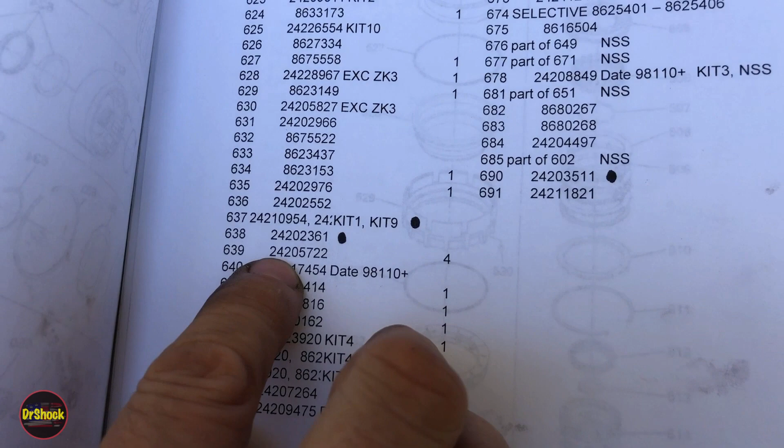I think it's probably these 4 722 ones here, but we can verify in our parts list. Take a quick look here, we're looking for part 639. Part 639 is 242.05.722 for this particular year, and that is exactly what we've got.

So let's go and fish them out from inside here. And that looks like them right there. 1, 2. There's actually a couple of different ones, so we want to make sure we get the right ones. I think it's these smaller ones. Just give me a moment, guys. 3, 4. Yep, that would be it, because there are 4 of those and 2 of these.

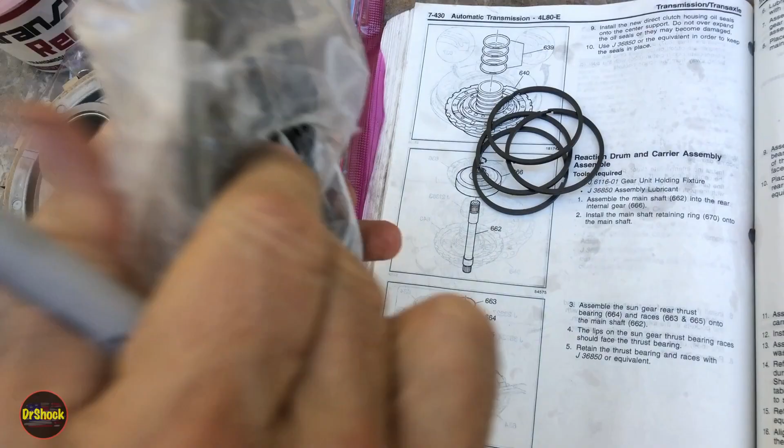All right, we're just going to make a notation that we got those and used them, so they consumed those 4 parts.

And these guys, just like when we took them off, right? So they're just opened like that. We're just going to open them slightly and work them down into position. You can either do the top one first or the bottom one first, it doesn't matter. You just want to make sure you don't damage them. All right, that's 3. Last one.

All right, so I just want to make sure they're in all the way around. And then, like the service manual recommended, I'm going to use a little bit of Transgel to keep them in position until we get the rest of the assembly done. After this, we'll move on to the next step.

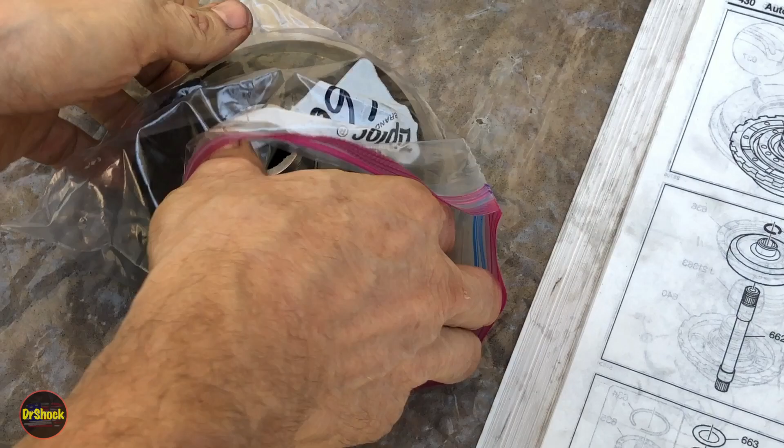Okay, next up, we're going to do the reaction drum and carrier assembly. So we're going to take our cleaned off and restored 666 part, and we're going to take our new 670, our 662 shaft, all cleaned up and ready to go.

Guys, just like I mentioned in the previous video, you're going to want to make sure you've sized for your bushings on these parts. Here's our old 670 that we just had for reference, and we got a replacement. These are discontinued now, but I tracked one down. 862-3212 is the correct snap ring for this.

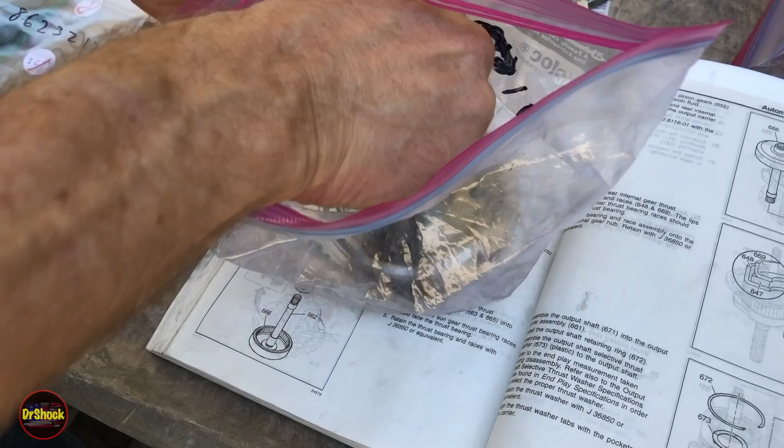Now, for example, like here, sometimes you have to dress these bushings up. So take this output shaft for a second, this 671 part. You just want to make sure that it fits. It should be a snug fit. Otherwise, what's the point of replacing the bushing? But it's got to fit, right?

Same with this shaft here. You want to size these 2 surfaces against the bushings in the sun shaft that's going to come up later. Sun gear shaft. All right, let's get this piece going, though.

All right, so you can tell the end that you need because there's a groove for the ring, and it's also a wider surface, right? So we're going to take this like this. We're going to put it in here. We're going to work it in until we have access to where the ring goes. And then we're just going to pop our ring in. That's all this step is.

Keep your finger on top of the ring so it doesn't go flying. Use a smaller kind of snap ring plier for a little ring like this. Hung up on the teeth of the gear right there. There we go. All right, just make sure it's seated all the way around. Got a little bit of a breeze coming through here, messing up the page that we're on.

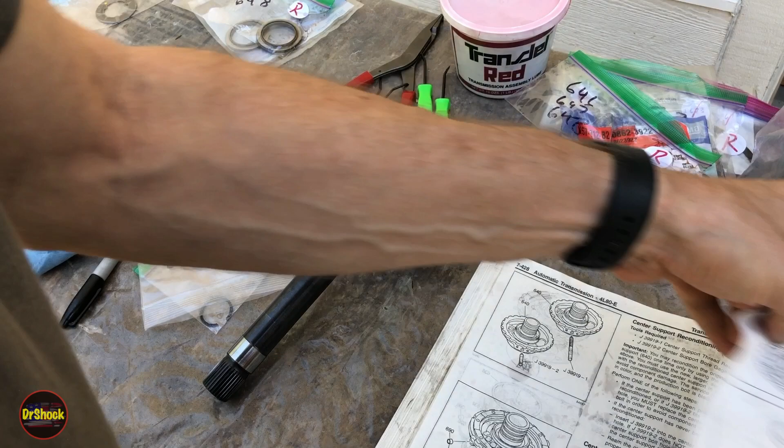All right, next up we've got this bearing assembly. And if you watch the disassembly video, you'd know that this also has a part that's not shown. This particular year has the spacer 691. So it's not shown in the diagram, but we're going to have to install it, or reinstall it rather.

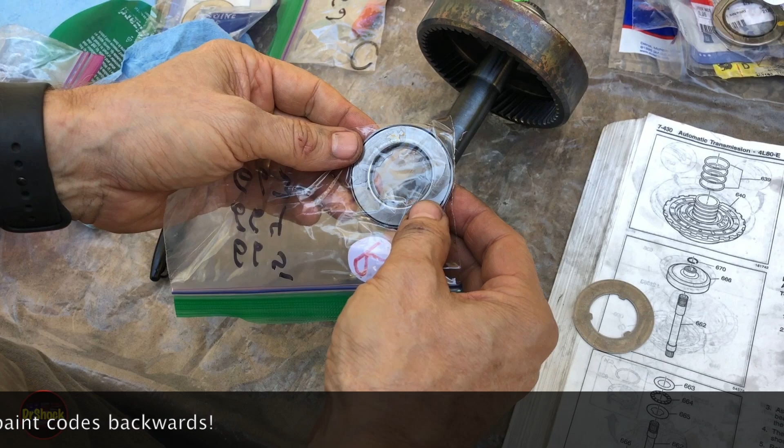And then here's our original 66345 bearing assembly. So we made a mark. This faces the transfer case is blue, yellow faces the torque converter. So now we have, yellow faces the transfer case, blue faces the torque converter. So now we know the orientation. We've got our new one here, which is a GM 242-08-848.

The service manual mentions that we should be using the trans gel to hold the bearing and races together. So we'll separate these three pieces out here. 1, 2, 3. And all they're really talking about doing is just kind of packing this bearing up here.

You don't have to use a whole lot here. I probably used more than I should, but just when this guy first starts up, you want him to have some lubrication, and you want this whole assembly to stay together, right? We're going to put some on the outside as well.

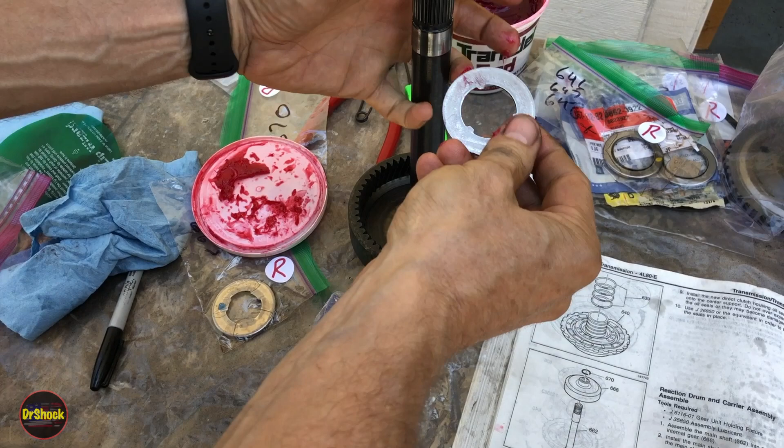This guy goes on there. This guy goes on there.

All right, the next step is they want us to take this assembly and put it into the output carrier. So we've got our output carrier all cleaned up and reassembled, or restored rather.

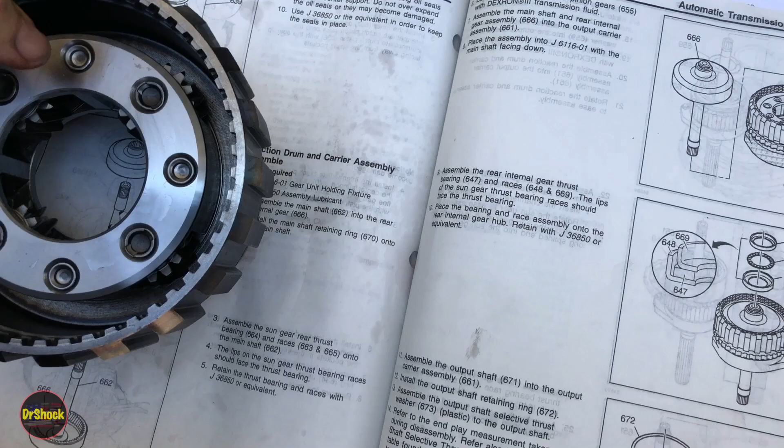Some of these bags out of the way. All right, and so this guy is going to go straight down here. What's going to happen is these teeth are going to engage those teeth. So what we're going to do to help that is we got to find our little ATF spritzer.

All right, we just want to come in here and spritz those gears down and spritz this area inside with Dexron 6. Right, just want to make sure we get it all the way in there.

Okay, now we can sit this guy in our little hole here. It's a bearing surface, so we're going to spritz that up.

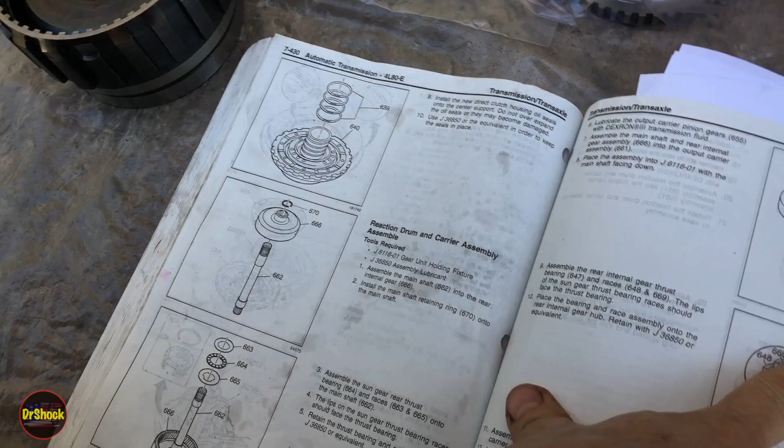And then they want us to put in part 669, 47, and 48. All right, here's our original bearing setup, 669, 47, and 48, with 47 being the bearing and 48 and 69 being the races. Right, so it's a setup like this. And this side faces the transfer case, and this side would face the torque converter.

We're going to replace that with an 862-3922 kit. I've already taken the liberty of greasing this guy up. Well, no, I thought I did. I guess I didn't. We'll go ahead and do that now.

Just going to take the bearing and trans gel him up. This is just to hold things together, but it's also to give it some lubrication for that initial start before we get the pressure up on the fluid itself.

All right, so this guy's going to go down in this position, that little lip up, just the way we saw here. That little lip faces the back.

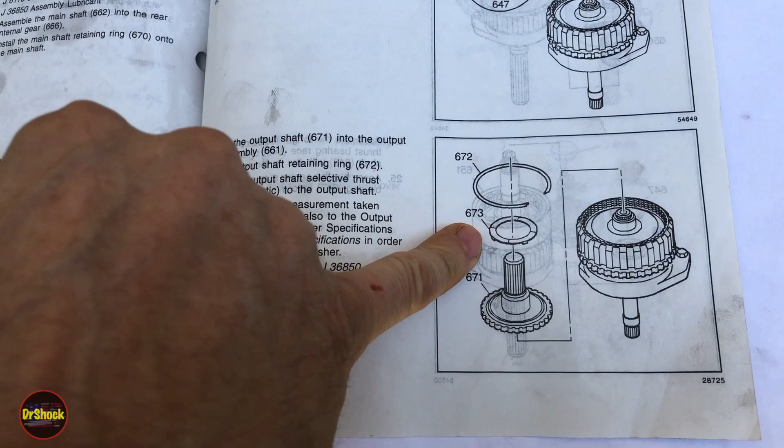And then we'll be able to put our output shaft on, sight him on top of that, and then we'll continue on with this piece here, right? So we're going to end up putting our output shaft on top of that, and then we'll end up putting this thrust washer, and then we're going to have this ring.

All right, and now we're going to drop the output shaft onto this. Now when I have a bushing, I also like to put a little trans gel on it. And then you're going to try to get these teeth lined up. That's going to sit down just like that, unless you haven't dressed your bushing properly.

And then we're going to take a 673 thrust washer, or spacer rather. I think this is just a plastic. Yeah, it is a thrust washer. It's a plastic thrust washer and a 672 retaining ring.

Right, so there's our old 672 ring. It's going to be replaced by a 862-6173. And again, when you see these red lines to the reference number, that means this part is recently discontinued, unfortunately.

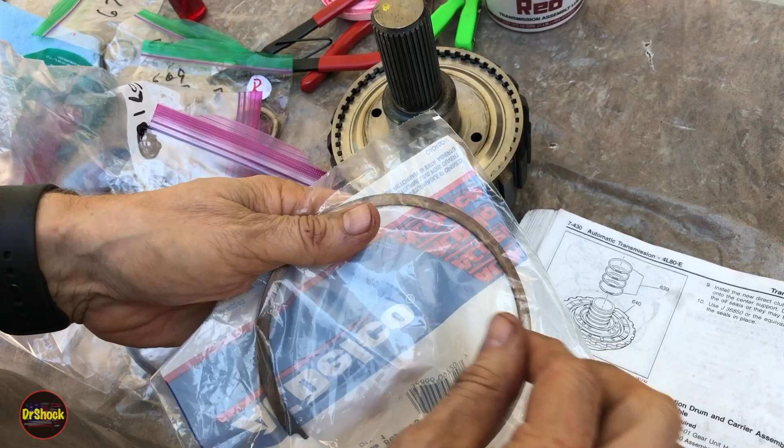And then we're going to put our 673 part on there. And our 673 part is another discontinued number. It can either be an 862-6372 or a more recent number, 242-41242.

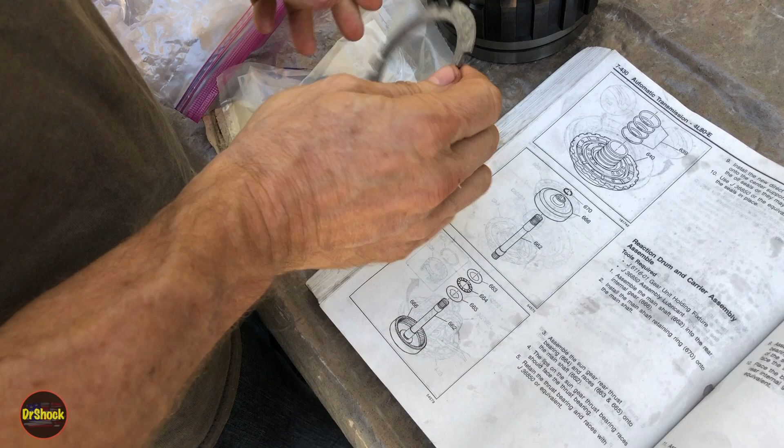Our original one, the reason we're replacing it, the original one here, you can see that the material on it that's plated is wore through, so it's just a lot of wear. We probably could have reused it for a stock rebuild like this, but anything that's a wear type of part, we've gone ahead and replaced. And again, this is a trans gel type of deal, both to help lubricate it for initial start as well as just to hold it together. These tangs go in the holes, just like that.

All right, let's get this ring on. We can do it by hand, I believe.

Just watch out we don't get our finger pinched. We use a tool right here at the end. All right, yep. Now we got, just make sure it's seated all the way in, and we're done with that piece. All right, what's next?

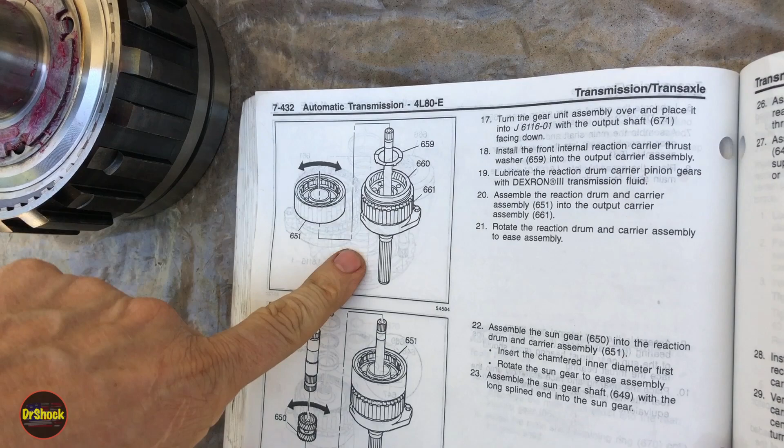Okay, so now we're going to turn this guy over in the other direction. We're going to continue with this assembly. So we're not using this tool, by the way, we're just using a piece of wood with a hole. But if you want to have a J 6116-01 and a vise, that's what the shop manual is talking about.

All right, we're going to lubricate the reaction drum carrier pinion gears with Dexron. I'm going to do that right now. Just going to spritz them up, spin them around, and spritz them up. Again, this is just to get things lubed up for the first initial start. We're going to go ahead while we're in here, and spritz these teeth.

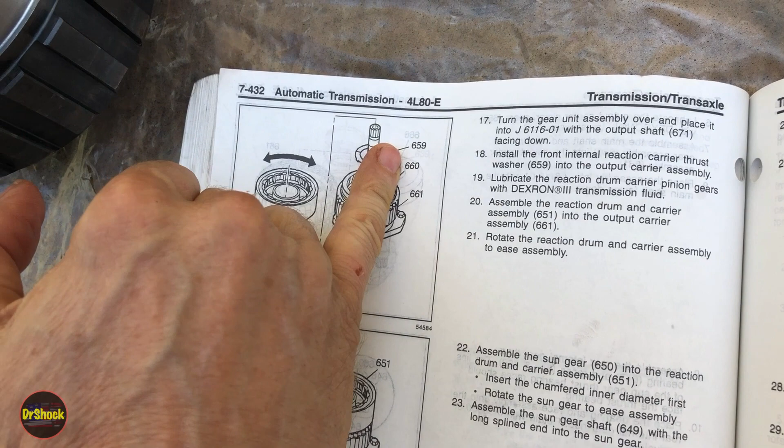Okay, and then we're going to go and get the reaction drum and carrier, and we're going to slide that in along with 659, which is a carrier thrust washer. And then we'll be ready to slide our sun gear inside here along with our sun gear shaft.

All right, here's our old part 659, which is the plastic thrust washer. Even though the service manual mentioned plastic earlier, the other one was metal. This one is plastic on our model, and it gets replaced by a 242-14809. This guy sits in here, these little nubs. Now the old one had 4 nubs, the new one only has 2. It still sits in the same place, just like that.

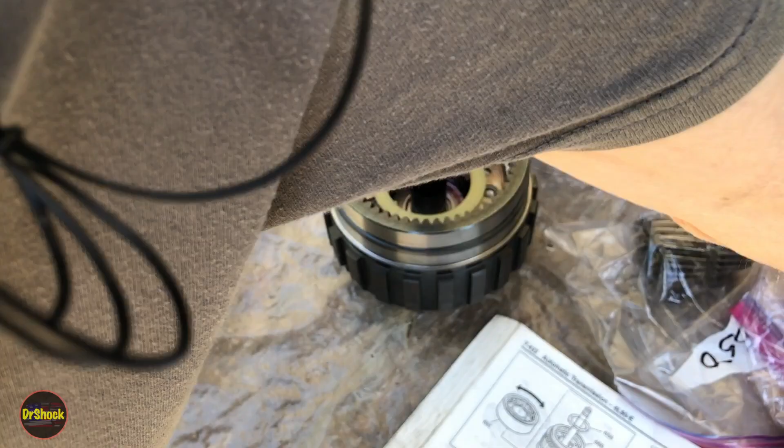All right, and now we've got our cleaned and restored 651 drum and carrier assembly. All right, so they want us to put that on top, so we're going to place that on top.

What we're going to want to do here is these planetary gears, we're going to want to give them a spritz. I forgot to do that.

Okay. Now these will engage with this ring gear here. All right, now that we got that in there, we got another bearing assembly to put in.

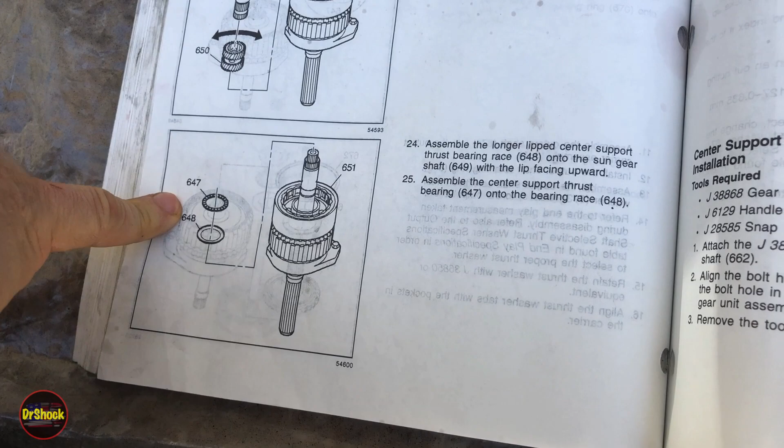So 47 and 48 is a race and a bearing, and then the other race goes on the center support, and then there's 642, which is a brass thrust washer. So they're going to want us to put those pieces together.

But before we get there, we've still got a couple more here. We've got 650, which is our sun gear, and they want us to make sure we insert the chamfered inner diameter first. So this side is beveled flush, this side is chamfered. And we also marked this with this direction here, with the blue facing towards the torque converter, so we know that the chamfered side is what goes in.

Right, so that guy's in. And then we've got 649, which is our sun gear shaft. Right, and they show in the picture here how this band faces down. You've got your two bushings on either end.

And what we're going to do, since we've got some bushings, whenever we have bushings, I like to give them a little extra help on startup. It's going to be a smooth fit here because we got new ones. All right, now that's in place.

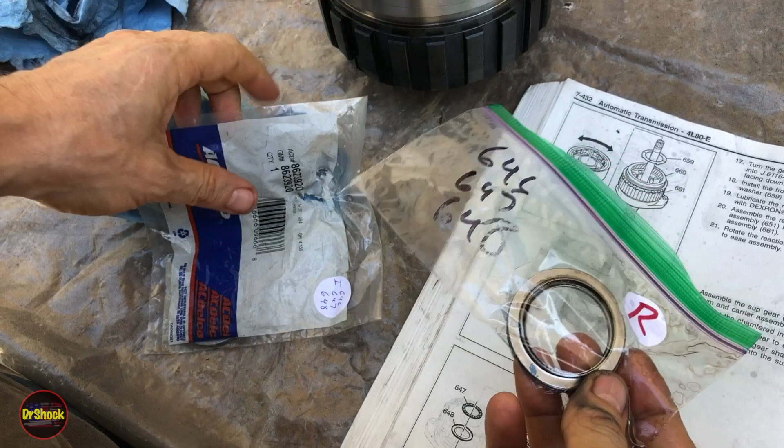And now we can move on to this bearing assembly. So here's our original one, 648, 47, and 646, 47, 48 rather, and that gets replaced by a kit 862, 39, 20.

I've already transgelled this particular assembly up inside, just to speed up some things. So what they want you to do is, they tell you here, assemble the longer lipped center support thrust bearing race onto the sun gear shaft, number 648, and then assemble the center support thrust bearing onto the bearing race. And then assemble the thrust bearing race 646 to the rear hub of the center support. So basically they want you to take this apart just to make sure it's going to go together okay.

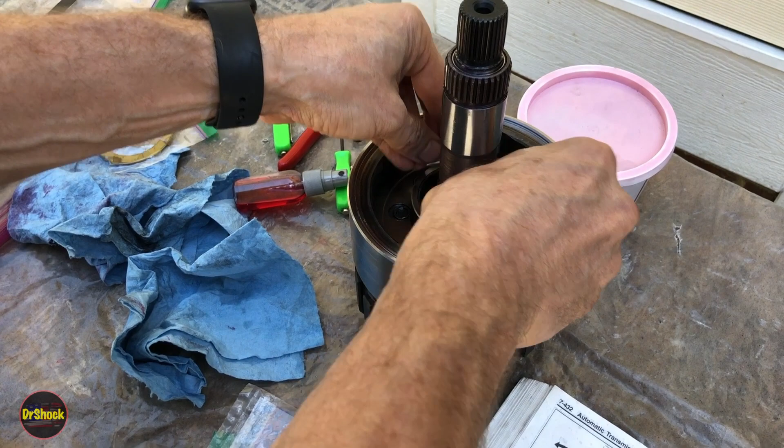Stick this on separately to the center support. So this guy we're going to go ahead and just drop in. And then we're going to grab our center support. And what they're wanting you to make sure you do here is position this one like that. That's all they're talking about there.

And again, we're going to want to lube up anything that might be a surface that's going to have friction, against a bushing or a bearing. Bushings and bearings get transgel. Right, so we're just going to go inside this center support here, get some inside here. And then we're just going to grab our brass thrust washer and put these two together.

All right, our original 642 is right here. We're going to replace that with a 24, 24, 14, 14.

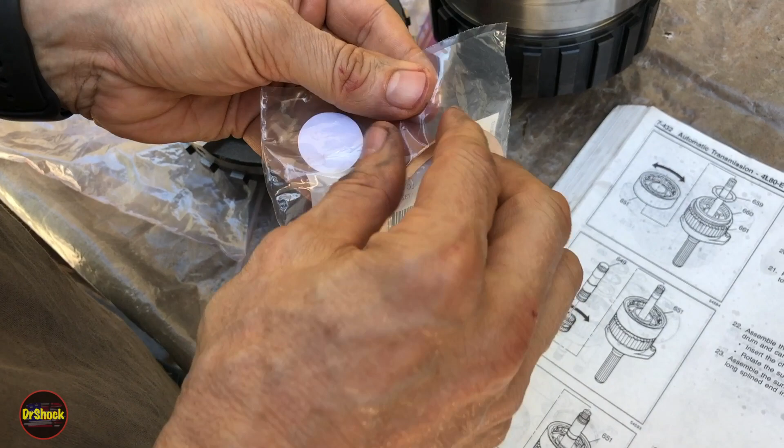So with this one, you want to make sure you're not bending anything. And again, since it's a type of bearing, we're going to give it some transgel.

That's exactly what the service manual says: retain the thrust washer with J36850, which is transgel. All right, so we're just going to drop this guy right down in there.

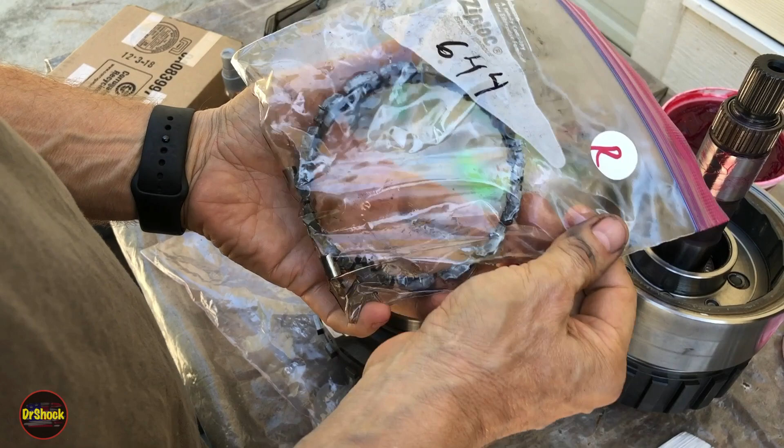Now we're ready to put the center support on top of this guy, but we got one more piece we need to add that the service manual doesn't talk about. So we took out our original roller, 644, and we're going to replace that with a 24290162.

This is just along that common theme where anything that is a bushing or a bearing that we replace, we're going to spritz this up as well.

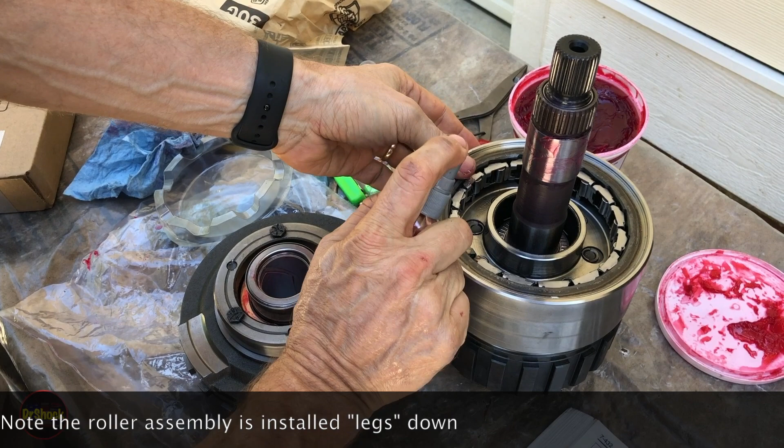Now with that done, we can do the step here that says install a new center support or the reconditioned center support into the reaction carrier. Verify correct assembly by holding the carrier drum stationary and rotating the center support. It should only turn counterclockwise.

So we'll take this guy, and again, we've got a surface here that we want to put some assembly lubrication on.

All right, so it should turn counterclockwise, but should not turn clockwise, and it doesn't. All right, so we're good.

At this point, we're ready to put it inside the transmission. So if you have a J6129 handle and a J38868 tool, you can do that. I do not — I'm going to show you a different tool that I'll be using. Let me go grab it, and we'll put this guy in, and we'll line it up inside the case.

All right, the tool I'm going to be using is just this very simple tool, again, from BET Performance. It sits right in like that and allows us to pick this guy up, right? Pretty cheap, does the job.

Now, first thing I'm going to do before I get this over is we're going to want to put some transgel where the case bushing is going to mate up to this guy, just to ease that assembly and ease that initial startup.

All right, let's walk over to the case. All right, guys, something else I want to point out here. Here's your center support bolt hole. As we put this into the transmission, as you look at the teeth that are cut into here, you'll notice that one is not like the others.

This guy here, that's at an angle. This is an indexing one. So if you come up a little bit from the camera from the top down, you can see it's kind of angled. When I put this in, watch how it lines up with the notched mark on the case.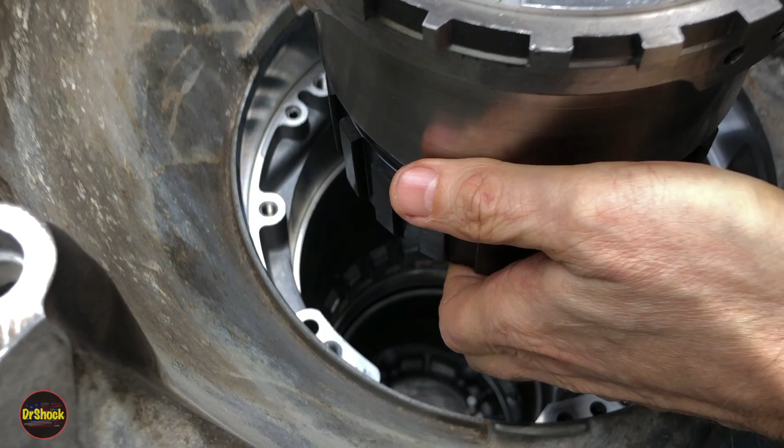All right, guys, we're going to put this into the case now. She is heavy, but you watch how I position that angled tooth here. Right, so you want this angled tooth on this side of this angled part of the case.

So at this point, we're ready to put in our beveled ring here. All right, guys, now we got the center support seated in there. We need to install the 633 retaining ring.

Now, this ring is different than all the others. It's very thick. I'll put my hand in here and make sure it can focus while we zoom in. And it's beveled on one edge. Right, so you can see there's a bevel on this leading edge. The flat side is going to go against the center support, and the beveled side is going to face up towards the torque converter. And again, it's going to go in the 9 o'clock position.

And again, to remind you, the 9 o'clock position with the pan at the bottom at 6 o'clock and the top peak of the bell housing at 12 o'clock, that 9 o'clock position is referenced by just looking at this lug where the 2-1 manual band seats. That's going to help you always know where that is.

Now, I'm not going to be able to get this in here with the camera, so we'll get it started, and then I'll bring you back while we fully seat it. All right, guys, let's go ahead and get it fully seated in here. Now, she should just pop right in all the way around.

Just like this. And you should end up, when you're done, if you got this right, with about an inch gap on this side, or more. You know, preferably a little more. It should be a number in that neighborhood.

So this kind of ring, it doesn't actually seat all the way to the wall because the groove cut for it in these lugs only goes so far, and it's also a very tight fit. So this is actually just fine.

Now, this ring's discontinued, right? So if you have a hard time finding a replacement, you can always reuse the old one in this situation when it's discontinued, or you can choose to go aftermarket on this particular part.

If it doesn't fit, here are things to check. One of the three bearing assemblies could be backwards. You could also have a problem where your selective thrust washer at the back is too big. Or the bushing you installed in the output shaft isn't recessed enough, so it's pushing up against the bearing assembly. Any one of those things could throw this off where it won't fit in all the way.

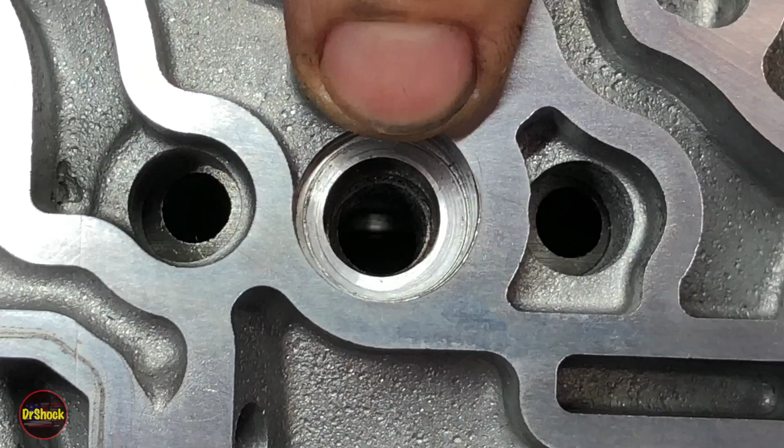But if you got it like this, then you're ready to move on to building the intermediate. We can see our center support threads here. Hopefully the light's getting in there so you can see that that's lined up correctly for the bolt to fit. We've got some final adjustments to do with a tool we're going to stick in here, before we put in the cooler line fitting.

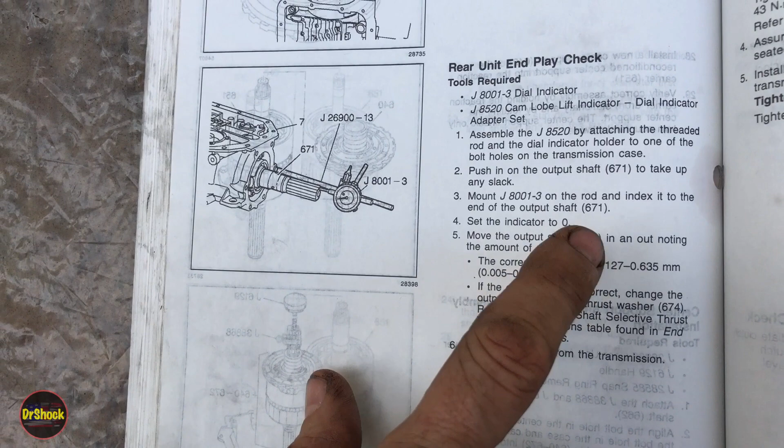At this point, we're ready to start the rear end play adjustment. After we get the 633 ring in, we need to do this rear unit end play check again, same as we did initially in the disassembly video. You set up a dial indicator on the rear and check to see if you're getting between 0.127 and 0.635 millimeters, or 5 to 25 thousandths of an inch. If you don't have the correct end play, that's when you change out those selective thrust washers we showed in part 1.

So let's take a look at what our end play is here. Same orientation as during the disassembly video. Just going to zero this out. I like to get a little tension on it and zero it so I can be sure it's really at zero. At this angle, gravity helps take the slack out. So now when I pull on it, I'm getting about 12 thousandths. Push it back in. We didn't have it in all the way the first time, so we'll do this again. Should be about 12 thousandths... 13. So 13 thousandths, which is within our specification. We're good, let's move on to the next step.

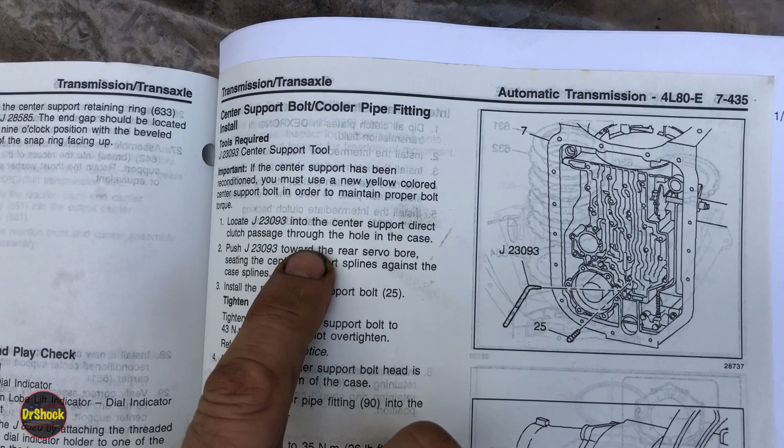The next step is putting in our new center support bolt and reinstalling our cooler pipe fitting. They talk about having this J23093 tool that sticks into one of the holes next to where the bolt goes in, used to push the center support splines against the case splines inside so it lines up perfectly for the bolt. I don't have this tool, so I'm just going to improvise with something else that fits in there.

Then we're going to get that bolt in there and torque it down to 32 foot-pounds. After that's done, we'll put our cooler pipe fitting back on and torque it to 26 foot-pounds. Remember there's an O-ring here. I'm going to replace that with a new part.

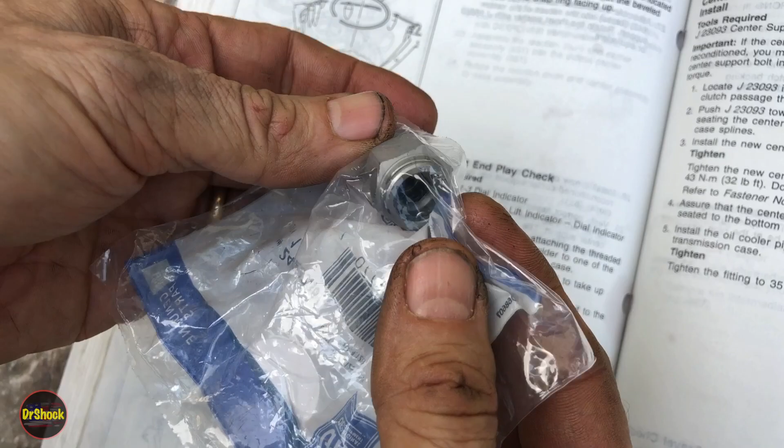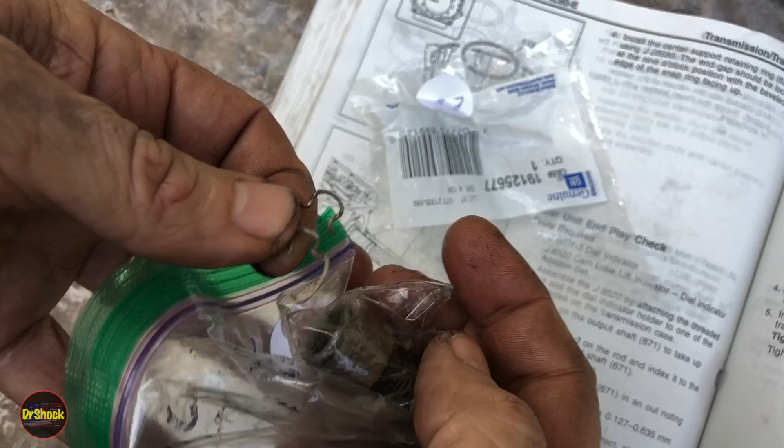Part number 24233367 - that's got the O-ring already built into it, and it's got the little clip built into it as well. And if you remember from the disassembly video, we took the other one off too, and we're going to replace that, part 1912-5677, the smaller one. Again, new clip installed. We have our original ones here, and you could certainly reuse these if you wanted to. These were just heavily corroded, so we want to proactively replace them to avoid leaks. If you do reuse them, you need to replace the little clips you popped out during the initial pulling of the transmission. Those clips should come in your rebuild kit - they do in the GM kit, but if they don't for some reason, part number 2420-5103 will get you a couple more replacement clips.

All right, let's go ahead and get these pieces installed. This is the location of the center support bolt hole, and these are the two ports they were talking about that you could stick that tool in. I'm just going to take a brass punch to make sure we don't have any slack on this, trying to push this back so we can get our bolt started into the threads here. I'll use a 12-point SAE 3/8 socket to get it going. Again, this is the reconditioned center support that you saw me do in part 1.

We'll take it in with the hand ratchet part way, and then torque it after we get the cooler line fitting installed.

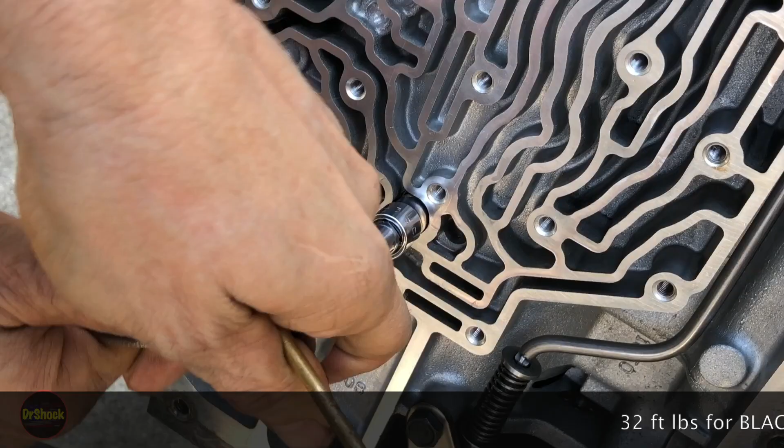This guy down here, she's starting to get a little tight. All right, we'll finish it up with the torque wrench. Now we're going to come over on this side.

Now if you look inside this port here, you can see the seal where we installed it on the center support. We already put a little bit of ATF on there to lube this guy up. Get this guy in there.

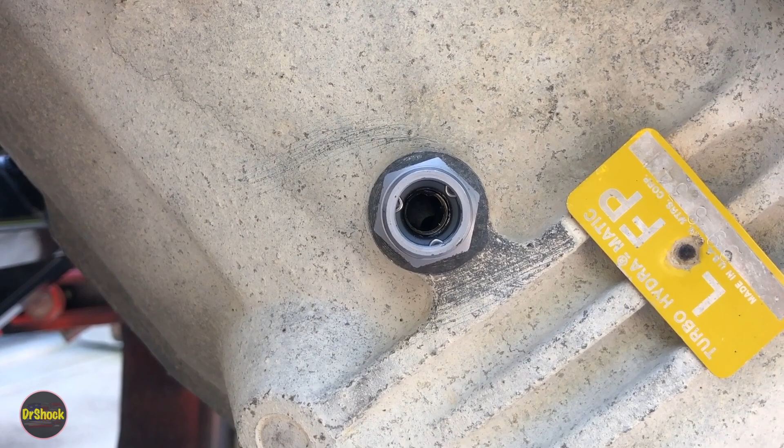The shorter one goes up on the front here. And if you're using the new ones, they already have some thread sealant on them. We will torque those two fittings up to 26 foot-pounds with a 19 millimeter, and we'll torque our center support bolt up to 32 foot-pounds.

All right, after we get these guys torqued down, again that's 26 foot-pounds on here, and again, make sure you get a little bit of ATF on the O-ring so it doesn't go in dry.

Now we're going to do the intermediate clutch. So we've got part 630 here somewhere. There we go, all cleaned up and restored and ready to install. And then we've got a set of frictions and steels and a wave plate. The wave plate is 684.

Here's our replacement one. And again, this is another discontinued part, 24204497.

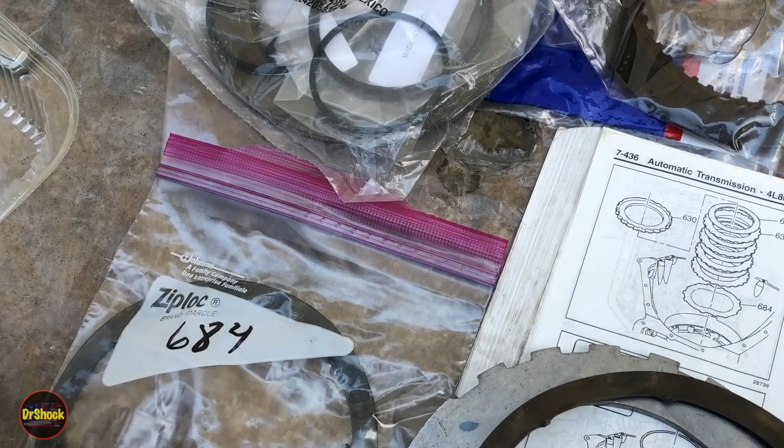And then in a GM rebuild kit, so you'll get new frictions. So part 631, those are 4 frictions.

If we wanted to know what part number they were, we'd jump over here and check our reference illustration and take a look here, and we see it's a 24202966. We look in our pack and we see we've got 4 24202966s in this particular package. So these would be our new GM frictions.

Now what you won't see in here are steels, because on a GM rebuild you do not replace the steels, at least unless they're burned out, scored, or damaged. You're supposed to reuse them. And so we've got our 4 632 parts here, all cleaned up and restored and ready to reinstall.

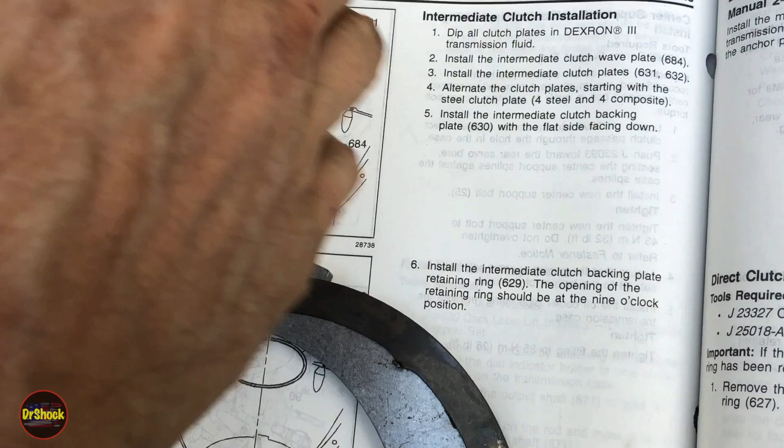All right, so when you take a look at the instructions, dip all the plates in Dexron 3. We're going to be using 6. Install the wave plate first. Install the intermediate plates in an alternating fashion, starting with the steel, so 4 steel and 4 composite or friction. Install the intermediate clutch backing plate with the flat side down.

Now, older years, there'd be a little depression like you see in the picture. But on this 99, it's flat on both sides, although we did indicate yellow for down and blue for up. We'll put it back the way we found it.

So these pieces don't get dipped. All of these pieces do get dipped. All I'm going to do for that is I'm going to put some AC Delco Dexron 6 in this little plastic container, and we're going to pop each one in, and then we're going to shift the camera over to the transmission. I'll show you putting them in. I don't necessarily show dipping, stuff like that.

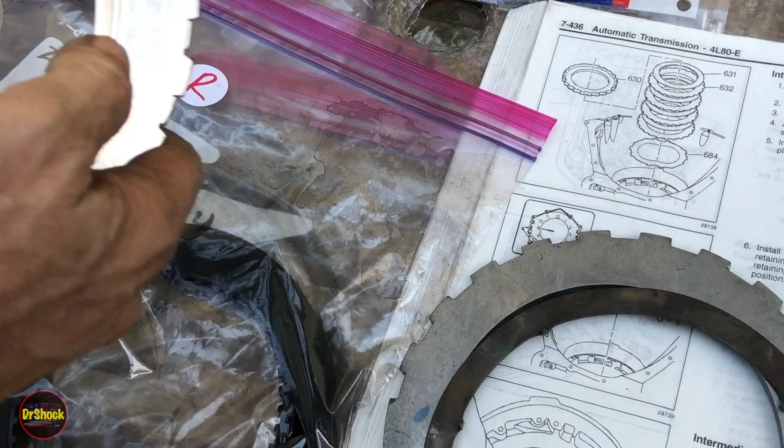All right, guys, just a quick view of our little dipping station here, right? You don't need to let this stuff soak. It's not porous. You just want to get it coated. So I'm going to move the camera over inside here, and then we're just going to start loading these pieces up.

So the first guy to go in is going to be our wave plate. And then we're going to put steel in. And then we're going to put a friction in, and then we're just going to keep alternating just like this until we get everything in. So we'll come back when we get to the last piece with the backing plate.

All right, last friction. Now when you start getting all this stuff in here, you're going to end up at some point having drips out the bottom. So you're going to get your pan back in just like when you took it apart.

All right, this plate's going to go in this kind of 9 o'clock orientation, right? We can just get it lined up properly. There we go.

And then the next thing to go in here is going to be our 629 retaining ring, which is going to be an AC Delco 8623149. And that's going to hold our intermediate clutch in position. And again, the open part of the ring is going to go in this 9 o'clock position.

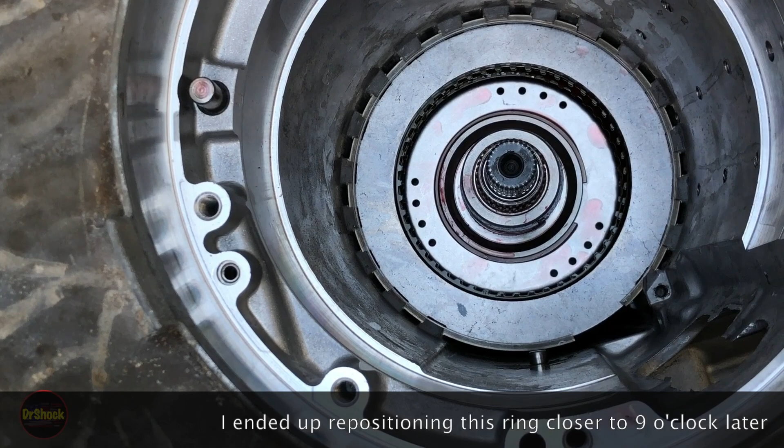Get our little screwdriver installation tool. There we go. Now we're done with that piece. Let's see what's next. All right guys, we got our 629 ring in the 9 o'clock position.

Now we move into another test to make sure things have the appropriate free play. Intermediate clutch piston travel check: feeler gauge between the clutch backing plate and the clutch retaining ring we just installed. We want to make sure we're between 40 thousandths and 107 thousandths.

We'll do that, and then the next thing we're going to do is a manual 2-1 band install. We're going to drop the 2-1 band in here, part 628, into the case, and I'll show you where that goes on the anchor pin or the anchor lug.

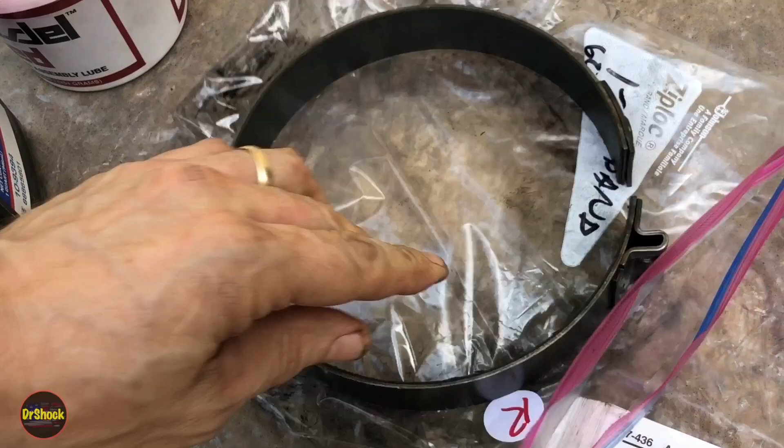Here's our old one, part 628, and this is another one of these things that's kind of subjective. This particular band doesn't get used a lot unless you're manually shifting. So the only reason I decided to do it was the composite material is kind of flaking off on the edges just from age, and I figure, well, while I'm in here, why not. So we'll replace that with a 2422 8967.

That's going to look like this. Same setup as our original one.

All right, so let's go do that piston travel check. Inside here, don't do it in the 9 o'clock position because there's too much flex in the retaining ring. You want to do it in one of these other positions.

But you want to come in here with your feeler gauge. I don't think I'm blocking your view—maybe I am, I'll have to get out of the way then. You want to come in here and make sure you can get within specification between the top of the backing plate and that retaining ring. In my case it's, what, 30, 59, 69, 79, plus 5 more, 84 thousandths.

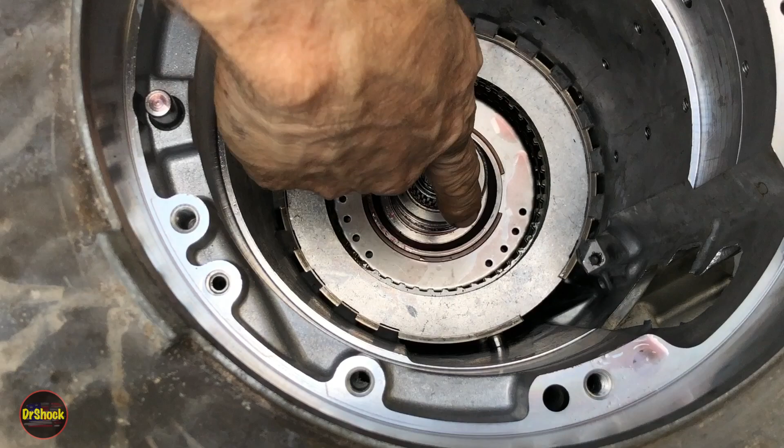All right, let's get this manual 2-1 band in here. So if you look down the case wall, you can see there's the lug that's pressed into the case right there. And directly opposite, towards the bottom where the pan side is, there's a hole here, and that's where the pin for the 2-1 servo would come through and actuate this band.

So on the band, this piece here that's spot welded on the end goes over the lug, and this little depression here is what the pin catches. So we're going to slide this guy into the case, get that round piece up there onto that lug—if I can get my fingers out of the way—and then get this piece sitting right where the pin is going to be able to grab it.

What you want to look for here: this thing will straighten itself out when we get the rest of the clutches in here. But you want to make sure this is well seated on that lug, and this is sitting on this shelf here so it can be pushed in. In fact, we're going to leave it just like that—that's about the best position we can do until we get the other pieces installed.

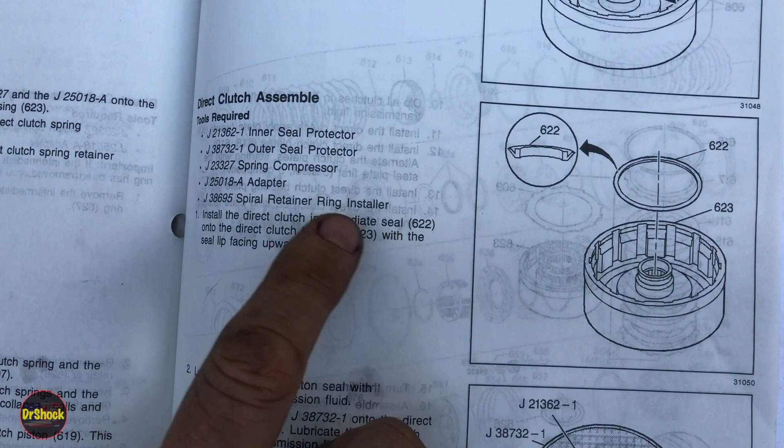All right guys, next up is assembling the direct clutch, part 623, and seal 622 is the lip seal here. They show you the orientation, and they tell you to make sure the direct clutch intermediate seal with the lip is installed with the lip facing upward—when they say upward, they mean the orientation of the picture. So here's our 623 direct clutch, all cleaned up and restored and ready to go.

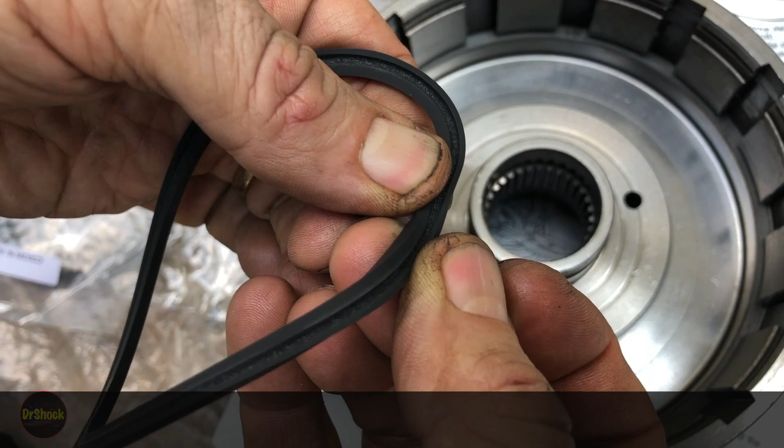Here's our original 622. I'm going to reach in our bag here and get our replacement 622. Then we want to take a look at where this lip is, right there, and we want to have this facing in this direction.

Never have too much lubrication for this sort of thing. As you put it in, just make sure it doesn't get twisted on you. There we go, and there's the lip—you can see right there. Zoom in, you want to be able to see that lip curling back right like that.

All right, now the next thing they tell you to do is install a couple of tools, a J21-362-1 and a 38-732-1. We're not going to use either of those—I'm going to use another aftermarket tool from BET Performance. This guy's going to slip on right on top here, and that's going to help us get our bonded piston in.

So these bonded pistons, like 619 here, you can technically reuse them, but this is a vehicle with close to 300,000 miles, and I view this as a seal. So we're just going to go ahead and replace it with the 2420-4961, which is a new replacement bonded piston.

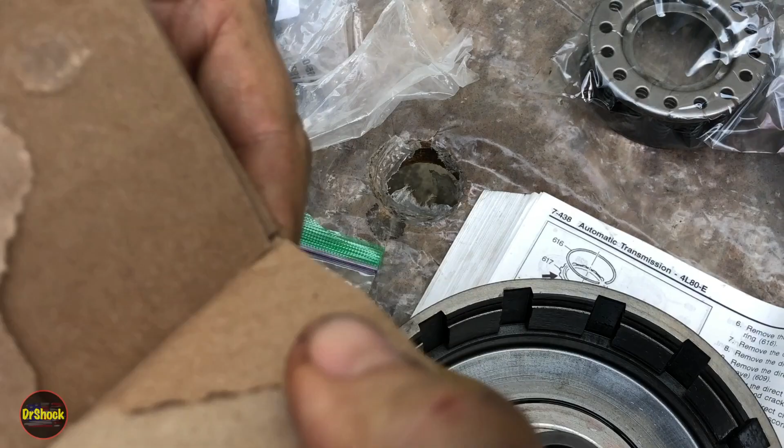Right, when they say bonded, it means the seal piece is just made onto the piston—so there's a seal here and a seal here. So we are going to spritz this guy up as well, and spritz this guy up as well, and then we're going to slide these two together. Now, not having the other tool will probably make this job a little bit more difficult.

I'm not sure if we're hung on the outside as much as we're hung up on the middle. No, there, she just dropped. She got our tool caught. All right, we're just going to give her a little spritz as we go around to where she's stuck.

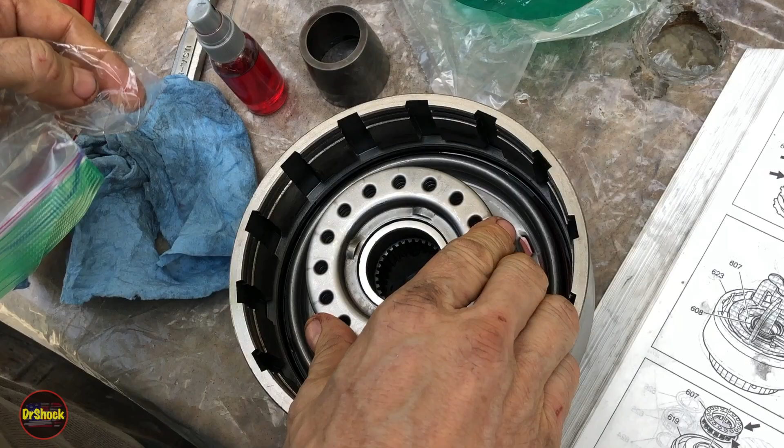All right, now with that out of the way, we can take 607, which is our spring assembly, and then we'll need a new 608 retaining ring, which is a GM862 3105.

And we're going to have to get our spring compressor aftermarket deal over here to do that. They again tell you you can use the J23327 and the J25018A adapter, a little mousetrap kind of deal, but we're going to keep using our aftermarket Amazon thing to do this. Just get this guy up here and we're going to compress him down around the edge so we can get in far enough to drop this snap ring into that groove right there.

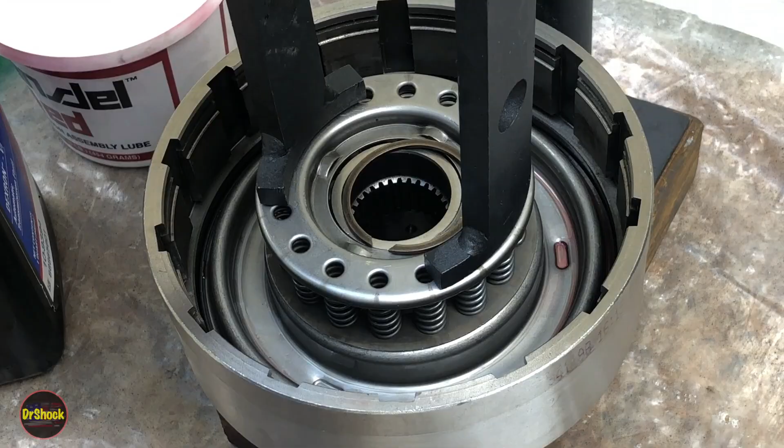All right, let's get this guy compressed down. Again, it doesn't take a lot of force. Too much force, you could bend or damage the spring assembly. But in this one, you just want to make sure it's centered before you start cranking it down. And as soon as you can see the groove, you don't need to give it any more force.

See if we can get it in with this tool. Always keep your finger around these guys in the back so you don't pop off. Like that—he would have went flying if I didn't have my finger there.

Let me see if this tool is a little better for this particular angle. I guess the one advantage of the GM tool is you'd have more clearance to do what we're trying to do right now. The aftermarket tool just doesn't really have that.

And the problem we've got here is you've got these little nubs that are preventing our ring from seating. Crank it down just a little bit more, see if that helps us with seating this guy.

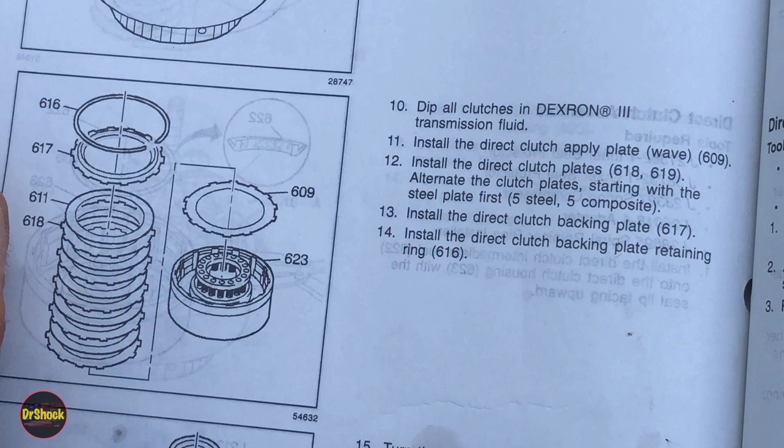All right, time for some more dipping. We've got to now build up the clutch pack that goes inside here. So we have part 617, which is the backing plate, all restored and ready to install. There's a 609 wave plate that we're going to be replacing, and a 616 retaining ring that we're going to be replacing—as usual, when you see these R's, it means I'm going to replace them. We've got 5 frictions, part 611, that we're going to be replacing, and then 4 or 5 steels that we're going to be reusing.

All right, and the part we'll be replacing that with: our wave plate we're going to replace with a 2420-5560 GM. Go ahead and get that out. And our retaining ring we're going to replace with an 862-3112. This replaces our 616 retaining ring. It's going to go on top.

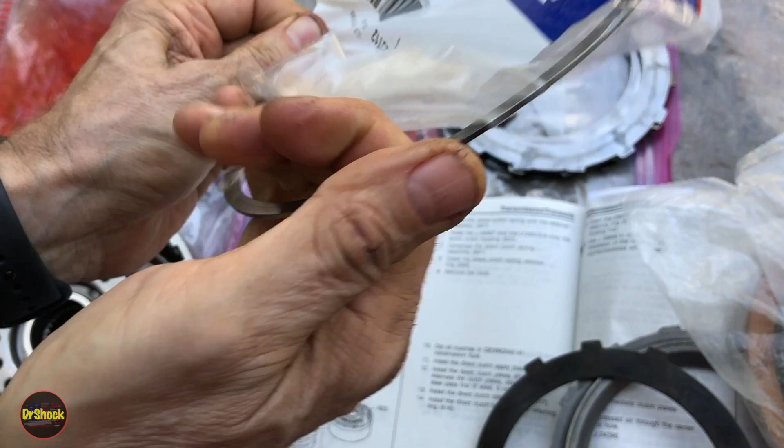All right, so the way this is going to work is we're going to put the wave plate in first, and again, very similar to earlier, we're going to dip all the clutches and dip the steels as well in Dexron ATF. We're going to install the wave plate first, then the direct clutch plates 618 and 619—actually that looks like a typo, it should be 611. So we're going to start with the steel plate first, then composite, and alternate. We're going to end up on top with a steel, then put the backing plate on, and then we'll put 616 on there to hold it all together.

All right, so this guy, there's no particular orientation on these. Just get that guy in there. We're just going to start dipping these in. Even though there's no particular orientation, we'll try to keep it consistent how we do it.

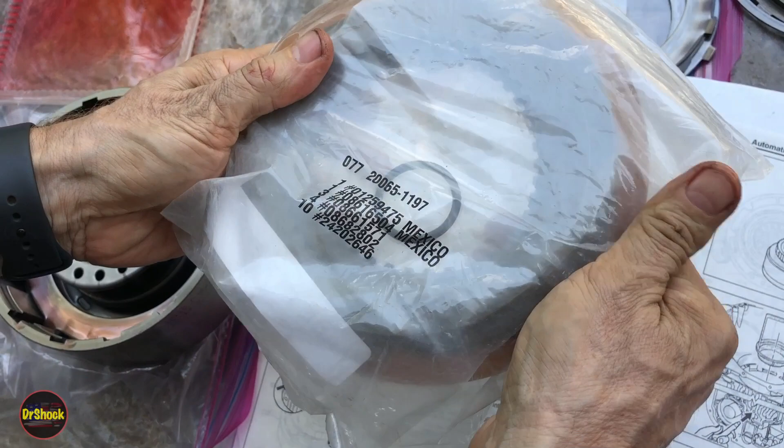All right, and I forgot to mention our frictions. So our frictions are going to be this 24202646 part. There's 10 of them in here. We're obviously not going to use all of them here, but the same one is used in multiple places.

Get out the ones we need. Just make sure real quick that we grab the right one. We did. And then we're just going to do this same dipping for each one of these. I'm just going to keep alternating back and forth.

Now, I know a lot of times people like to replace the steels if they've been heated to the point where they've got warpage type damage. Then yeah, you should do that. But if not, there's no need, at least according to the service manual from General Motors. Again, that's for the stock rebuild. If you're doing a performance rebuild, it'll be a different set of considerations. So I'm going to keep going here until we get to the top, and we'll come back.

All right, guys, last of our frictions. And now our backing plate. See, our backing plate's flat on one side, then it's got this ridge on the top piece. We're going to put the flat side towards the friction material, and we'll put our new ring in. Let's see if we can get this in without having to go grab any tools.

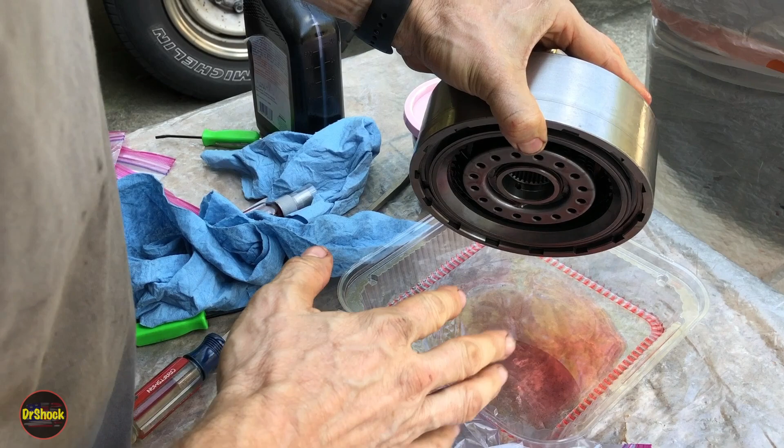Now we're going to flip it over, and since it's probably going to have some excess fluid leak out, we'll probably just sit it over our drain pan here for a little bit. But what we're going to continue on with is flipping it over, and we're going to put the 626, 625, 624 pieces on top of 623, and then we're going to seal the whole thing with a special kind of snap ring that twists on. We're going to use the J38695 because that's the best tool to get that type of ring on, and then we're going to install it in the case.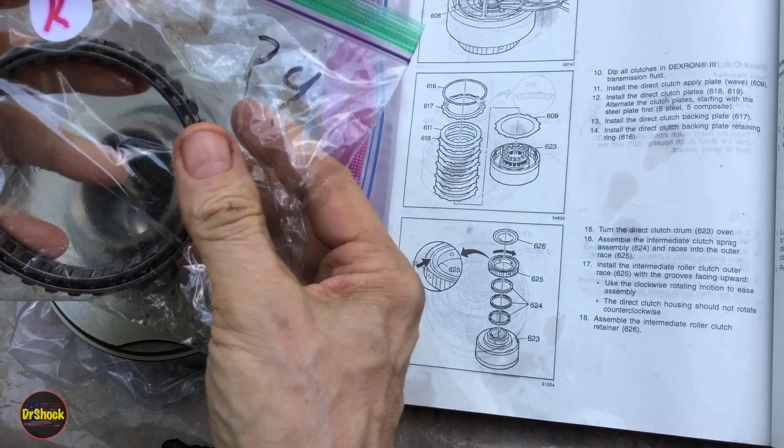All right, so we're going to put our bottom 624 on, right? It's got like a little cup opening, that over there. And then we would have put our roller clutch in here, 624, but again, it's a bearing type part, so we're going to replace it with an 863 3173, which looks like this.

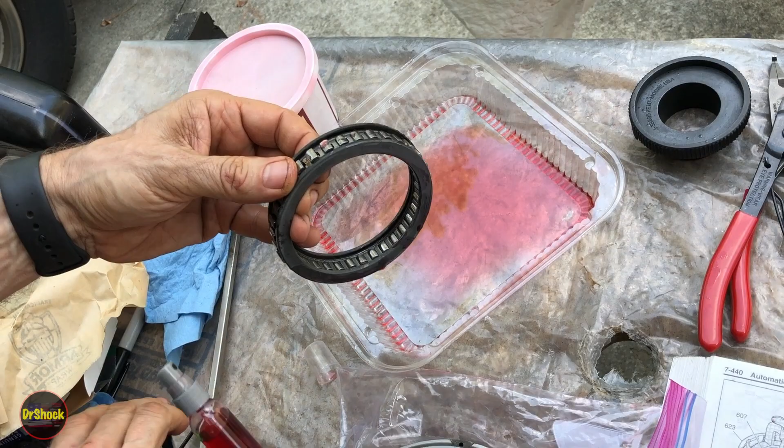I'm just going to give this guy some spritzing. Actually, I didn't realize that the replacement one comes with new top and bottom pieces, so we'll just use the whole thing as a unit. So we'll take off the used one, and we'll just drop the whole thing on as an assembly, like so.

All right, and then we're going to take 625, all cleaned up, restored, ready to reuse. They're telling you one side's perfectly flat, and the other side has some grooves cut into it. And plus we paint marked it so we know this is what faces the rear.

Actually, I got our little top piece cockeyed on us here. I want to make sure we lube up the inside before we try to put this on, and we lube up around the bottom. All right, so this is going to slide around the outside edge of that.

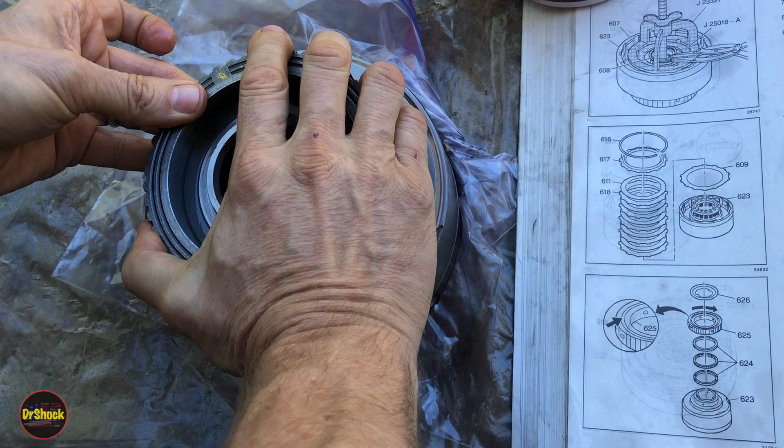So we were right here putting this sprag piece on, or this roller clutch rather, and now we're trying to put this race on. The key to this, if we take a swing over here at the service manual, is we've got to make sure the ridges are up, and you're only trying to turn it in a clockwise direction. Use a clockwise rotating motion, right? It can't go counterclockwise, it's got to go clockwise. Sometimes this can be a real bear to get on, but we'll try it like this first. If we don't have much luck, I'll show you a different way.

I'm probably just going to jump to the other way. The other way says take this off and put it on the race first, and then install the race onto 623. So we're going to do that. Make sure we got these two pieces tightly on here, and then we're going to do it like this.

And this piece is fragile, right? So you don't want to force anything with these little rollers, particularly since, in my case, we're replacing it in the first place to get a new one. We definitely want to treat it gently. Get all these guys in the race evenly. Just got to watch what you're doing here, so nothing gets bent or cocked. All right, so now everything's kind of happy. Now what we'll try and do is we'll try to get it on this way.

We're just going to try to make sure we go in the direction we want it to land in. All right, there we go. So the whole idea here is this goes in this direction, but not in this direction. If it goes opposite, the thing will burn out in just a couple of miles, more than likely.

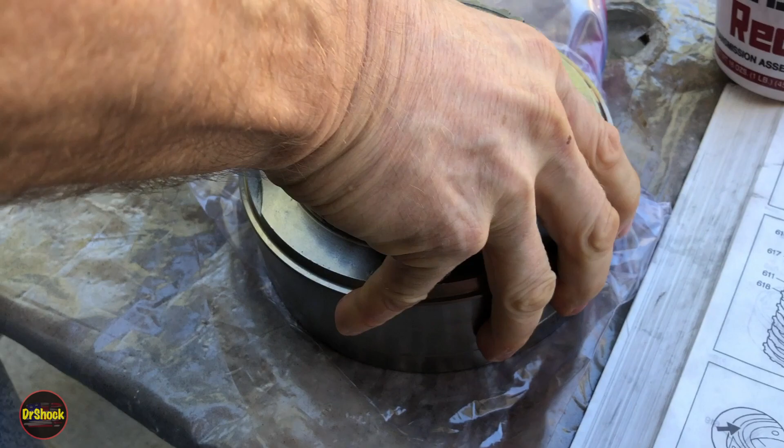All right, I'm just not totally happy with whether it's fully seated or not. Yep, it is. So what I'm looking for here is making sure the bottom of the race is flush against the top of 623. Now we can open up our 626 retainer and fit it into these two notch grooves here, and that's going to leave us with just enough space to put the retaining ring in.

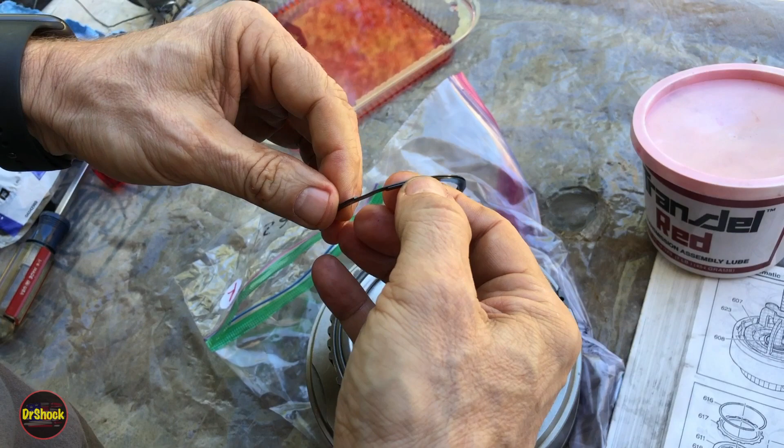You can see there's a little cutout for what would be a snap ring, although this particular guy does not get a snap ring. If you remember, this guy gets 627 in the disassembly video, and this guy is like a slinky, right? It's like this, like a spiral deal. And we're going to replace that with a new GM part, 867-5558.

Taking a look at the service manual over here on this step, install the roller clutch retainer ring onto the direct clutch housing hub and use J38695 to complete the installation, rotating counterclockwise while pressing down. So that's what this guy looks like, J38695. You actually start this by hand.

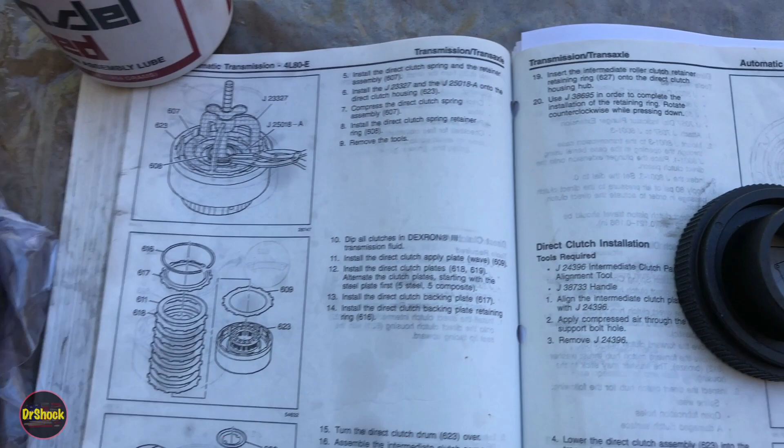I like to get it into one of the notches first, and just kind of walk it around. Just make sure you're not bending it, not putting any excessive force on it. And when you're trying to get it around, you're opening it up — you're not pulling up on it.

All right, so now we're ready for the tool to lock it into place. You can hear it click as you turn this tool counterclockwise. And then when you're done, this guy will all be locked into place, right? So you just want to go around, make sure everything is under where you want it to be. Just make sure it goes this time, one more time here, just to make sure it's squeezing it all the way under.

All right, yeah, I feel like that's a little better. Now we're ready to install it. Now if we look over here, the next step talked about the direct clutch installation, and they talked about having a J24396 and using this to align the intermediate clutch plates, and you can also put compressed air through the center support bolt hole in order to get that lined up.

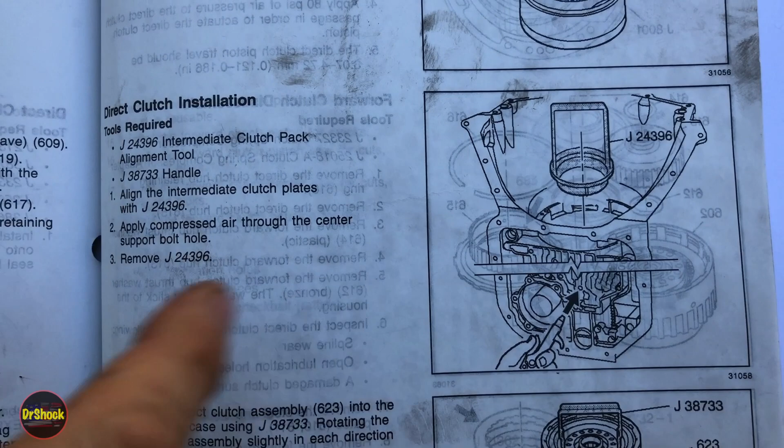And what they're talking about there is these notches on this race have got to fit into the teeth of the frictions on the intermediate clutch. So let's go over to the transmission and show what we're talking about.

All right, so here's our tool, J24396. All this tool is, you've got a round circle here with a ridge, and then you've got a notch stamped into it. The purpose of this is to help line up the teeth on the friction. So if we look down here in the intermediate clutch, you can see these guys are all a mishmash right now.

So you can do a couple of things. You can put this tool in and just kind of wiggle it around like this until it seats, right? And that's kind of like what it does.

The other thing you can do, if it's still not working for you, or it's got a little bit of tightness to it, is take air, 40 psi, and come down here on the front where we have our center support bolt hole. You can put air into that hollow bolt, and watch what happens up here with these frictions with the clutch when we do this. When we apply this, like when we tested it and did the center support, it's going to go ahead and activate that piston.

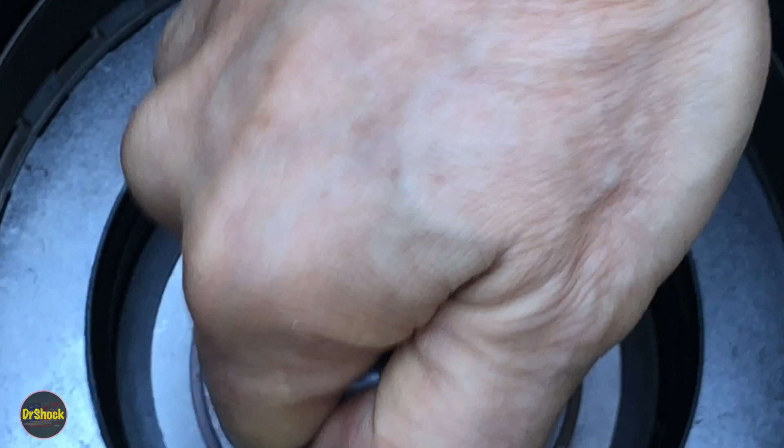So this whole thing is going to lift up. One of the things you can do is use this to keep those guys tight. Once you get them where you want them, you can keep them tight, and then insert the direct clutch assembly in there.

So now to get this guy in, if we flip around here, the service manual talks about this tool. J38733 is basically a holder to drop this guy in. And if you got that, great. That's, in my opinion, an optional tool.

This tool we just looked at is a nice-to-have tool. You can get away without it. Now that you've seen what it does, you can probably improvise something. This just makes it a lot easier, in my opinion, but it's not a must-have tool. This is definitely an optional tool. You just need a way to pick this up.

And the way I pick these up is just take a couple of S-hooks with some heavy-duty wire, and you're going to hook it in the same place that tool would hook it, and that's going to let you pick this guy up. No problemo. Let's go over and get him inserted into the transmission.

All right, so with our tool telling us that everything is lined up, we should be able to drop her in. Let's hook on our little hooks. We'll bring her over and set her inside.

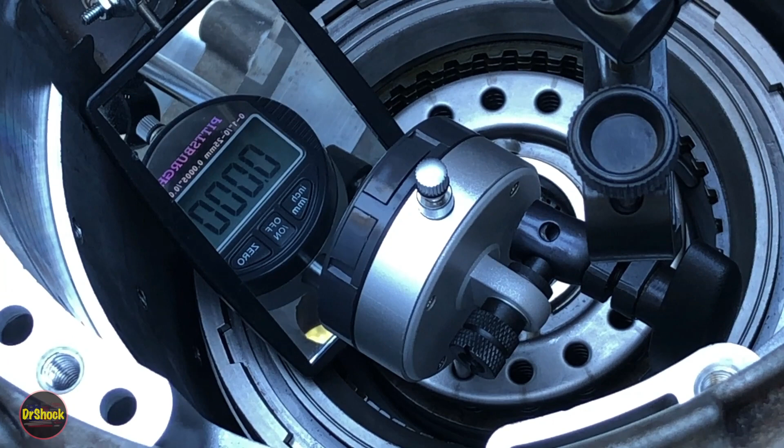So about 0.090. I've done this test a few times. I'm getting anywhere from 90 thousandths to 95 thousandths. So what is this test?

Well, I'm coming in over here, and to the left of the center support bolt, there's a port here. I've just made an adapter because I don't really have a fitting here. I've got a couple of different airline rubber fittings, but none of them can clear the valve body properly. So I grabbed one of our adapters off of the cooler cleaner that we'll use when we get ready to put this back on. Put a little piece of rubber hose as a gasket, and we got it wedged in there to make a nice airtight seal. And then we can come in here like this and run this test.

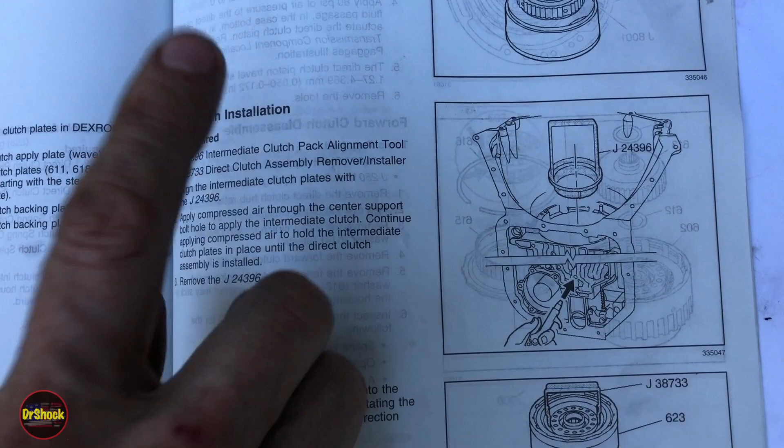Let me go show you in the service manual what this test is. All right, so we put the direct clutch in, and we got it lowered into the unit. And this last test we just did was this direct clutch piston check, piston travel check, right? So what we're trying to see is not whether the clutches move, but the piston moves.

So we run the dial indicator down through one of the holes in the spring assembly to make contact with the piston. We apply 80 psi in this case because what we've got to do is run air all the way up through the center support and into this direct clutch to move this piston. It's got a much stronger spring, so we need to double our psi to 80.

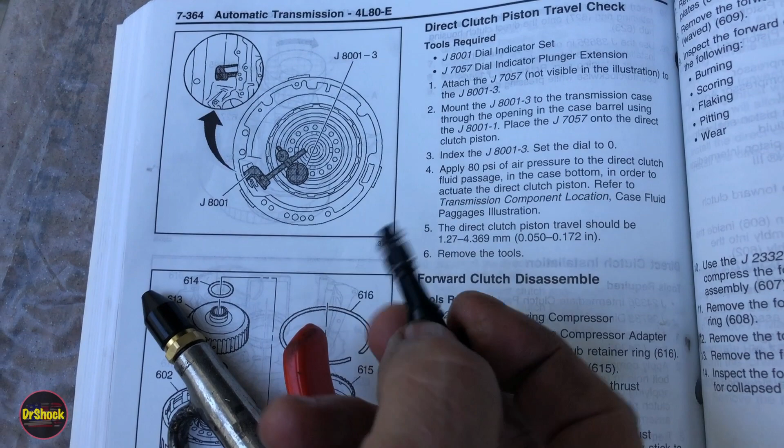And we're going to run it. They don't tell you in here, so I showed you it's on the left-hand side, and then that's how you can actuate this. And you can see it. I use this little adapter here, and they want to make sure that the piston travel is between 50 thousandths and 172 thousandths, and we measured between 88 and 90 thousandths.

I've done this test, like I said, about 4 or 5 times, and I'm getting anywhere from 88 to 92 thousandths. So we're within specification, and we're ready to move on to the forward clutch.

But at this point, guys, we're done with part 2. I'm going to call it at this point because it's getting kind of long, and we'll pick it up with the forward clutch in part 3.